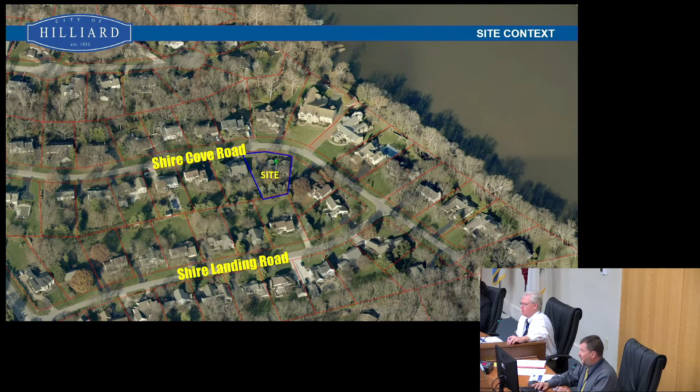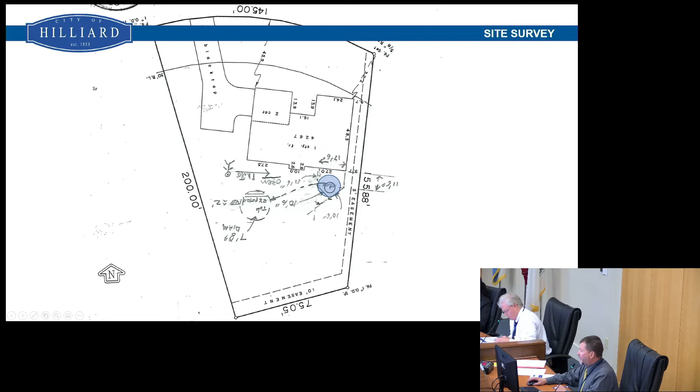This is a request for a variance to the code regarding swimming pool fences. The site is on Shire Cove Road as indicated on the screen, located within the Shire Cove subdivision, lot number 72. The site plan shows the general location of the existing hot tub. This is an instance where we've had some code enforcement action on the property, and this is a case to bring the site into compliance.

The staff believes that there's a beneficial use of the property that can be made without the proposed variance, and the proposed variance from the pool fencing requirements is substantial. The property owner's difficulty, we feel, can be obviated through another method, and we respectfully recommend disapproval. As noted in your staff report, there are a total of 7 cases regarding pool fencing that the board has looked at in the past, and we have noted the condition the board has imposed in those cases.

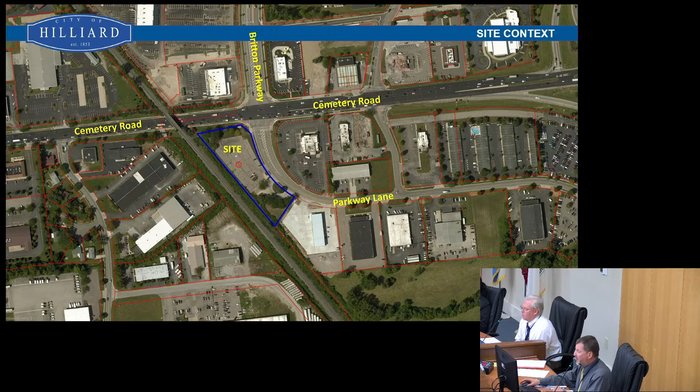Currently, the site is a COTA Park and Ride. Due to levels of ridership, they're looking to split this into two different developments—to maintain the COTA Park and Ride on the south portion of the site, and then to install a 3,400 square foot bank on the northern half along Cemetery Road.

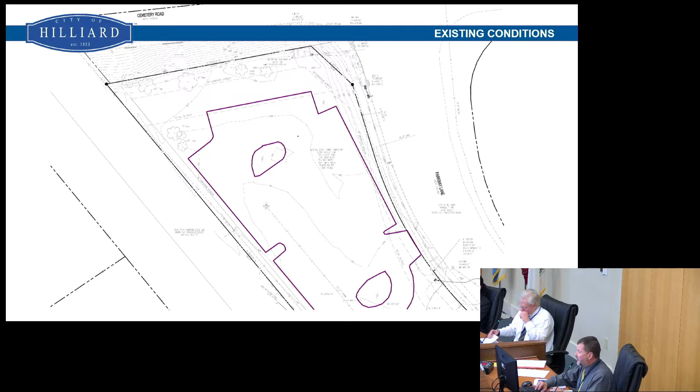What's shown on the screen gives you an idea of the existing pavement. The bank will be located within that area in general. They're looking to actually slightly reduce the impervious pavement on the site.

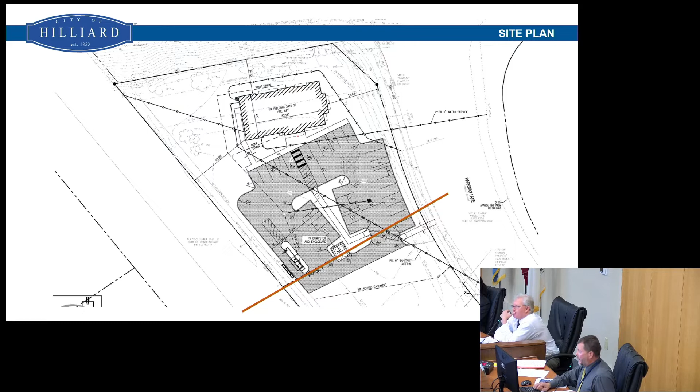This shows you the site plan and in general where the property line will be located, as approved by the Planning Commission as a lot split in their meeting last week. The commission also approved the Level B site plan for this as well.

The proposed architecture—the building will be located up along Cemetery Road. As noted in your staff report, we originally had a variance noted for the building setback, but upon further review of the code, there's actually a provision that allows for the reduction in the setback if you're placing parking behind the building, so that variance is no longer being requested.

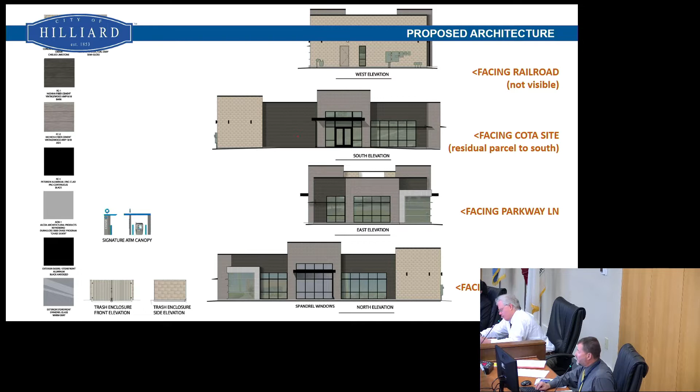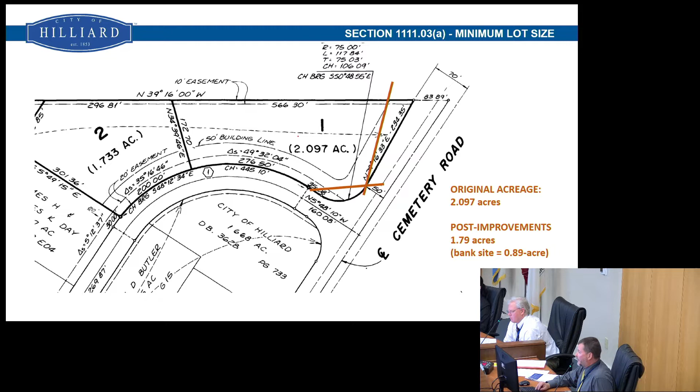They're also requesting a variance for the rear yard setback. This is going to be a joint parking lot between COTA and the Chase Bank that will use a cross-access agreement, as shown by the dotted line here. In general, the parking lot will provide a significant level of parking for both the bank and the levels of use that they need for the COTA Park and Ride.

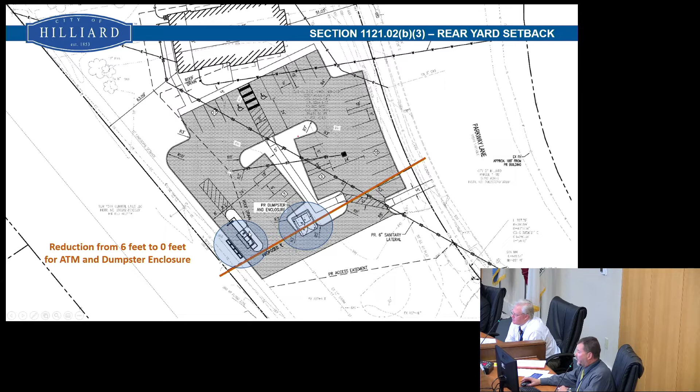They're requesting a rear yard setback to place the dumpster as well as the ATM along the rear joint property line that runs through the parking area.

They're also requesting a street tree waiver. There are significant utilities located along Parkway Lane, as well as the steep grade change due to the railroad overpass, so for those reasons we really can't place street trees in those areas. We're requesting as part of the conditions that those inches in street trees be placed on site or in an appropriate location as deemed necessary by the city forester.

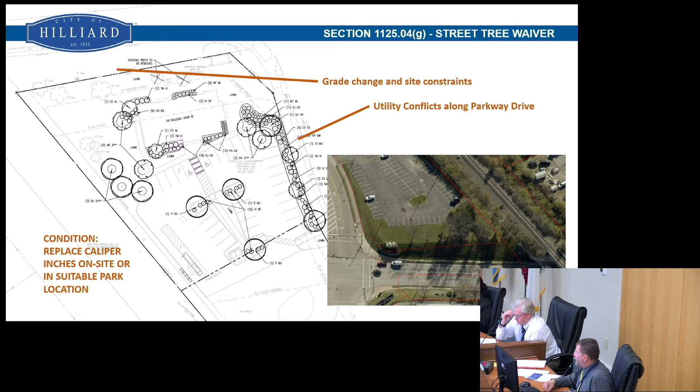They're also asking for some slight modification of the landscape code requirements, and we have those shown on the screen. They're asking to reduce the buffer width along Parkway Lane from 20 to 10 feet. The existing condition is basically at 10 feet, and so they're attempting to maintain the current pavement area. They are, though, placing the appropriate amount of landscaping along Parkway Lane within that 10-foot buffer.

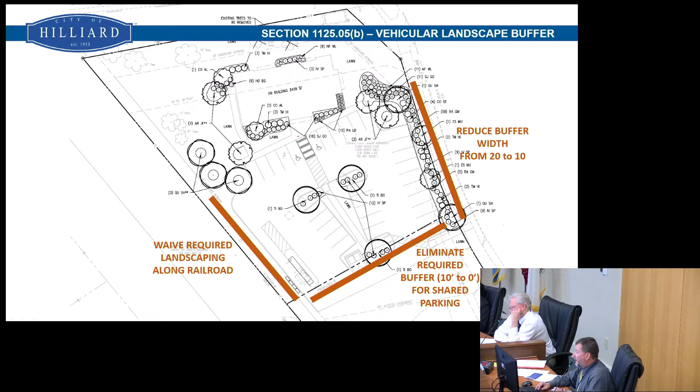They're asking to eliminate the required 10-foot buffer along the southern property line because the parking lot is being shared between the two parcels that would be created. They're also asking to waive the landscaping required along the railroad because of the intense vegetation that's currently there, so providing those landscape elements would really serve no purpose.

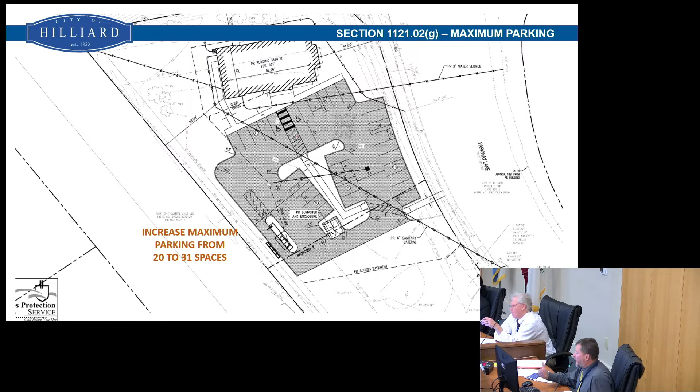The code also requires a limit to parking beyond what's required by the code, so a maximum limit. They want to increase the maximum parking from 20 to 31 spaces, and part of that is due to the fact that this is going to be maintained as a joint area between the COTA Park and Ride and the bank.

They're also looking to modify the ATM stacking and aisle requirements. The zoning code requires a width of 14 feet. We've very recently heard a request from a car wash application to the same effect. They're looking to reduce that from 14 feet to 9 feet. Originally, as noted in your information, it was 8 feet, but based on further discussions with Chase, Chase would like to maintain at least 9 feet of pavement. So they're looking to shrink this island up a little bit to accommodate the extra 12 inches of pavement. Is it 9 feet or 8 feet?

It is now proposed to be 9 feet, so they're actually more compliant with code. It's 8 feet in your staff report, but as of today, in talking with them, they wanted to modify that to 9 because Chase is actually going to require more pavement.

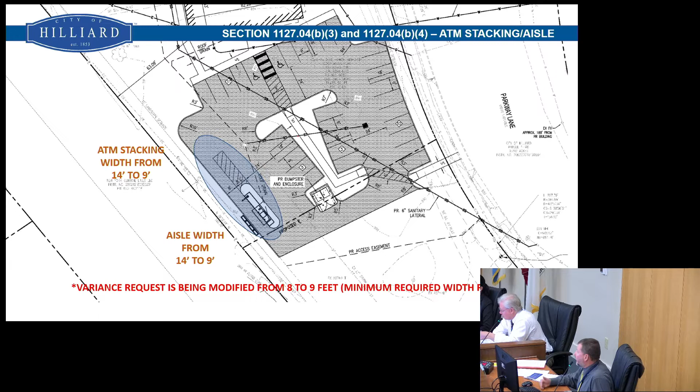Staff believes that the property has multiple site constraints that include impacts from the rail line, right-of-way improvements and takes that have occurred in the past, as well as the topography of the site. We feel that the proposed development is generally consistent with the code and keeping with the recommendations of the community plan to get buildings up closer to Cemetery Road, and we believe that the proposed development will not adversely impact the area. So we recommend approval with the 6 conditions indicated in the staff report.

Any questions for staff?

How many entrances will there be to this location? In terms of auto access, they're utilizing the existing curb cut, so there'll be 1 curb cut as it stands now. Will the buses be coming in there too? The buses actually have a turnaround that is just south of that, so it's completely separate from auto traffic. So they're not getting into that at all? No.

They'll share the parking with them, correct? Correct, the parking will be shared. South of that proposed lot split line, there's additional parking that will be maintained as part of the COTA site. And the existing trees on Cemetery Road, would they still be there? There are a few shown in the plans that will be removed due to construction activity. Those are being replaced per code.

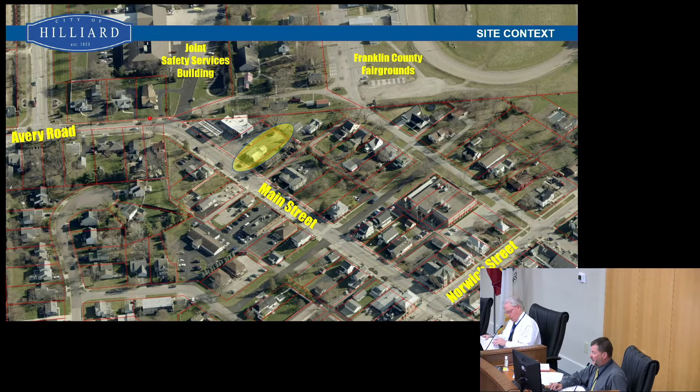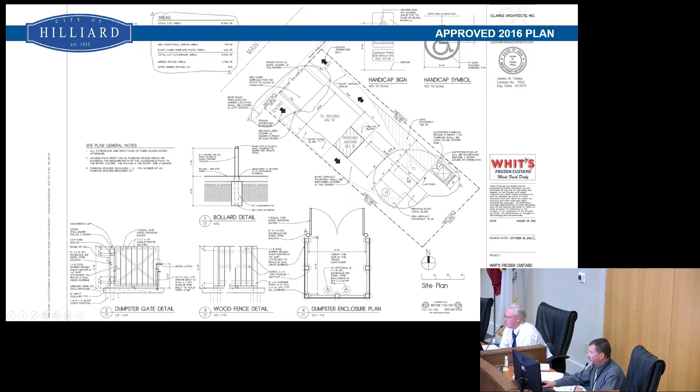Over time, that pavement was expanded out by gravel or other material onto the site. And then as of this past February, with I believe some code enforcement action or follow-up, there's striping and improvements done to the existing pavement. And then in question is the area that's shown in gravel.

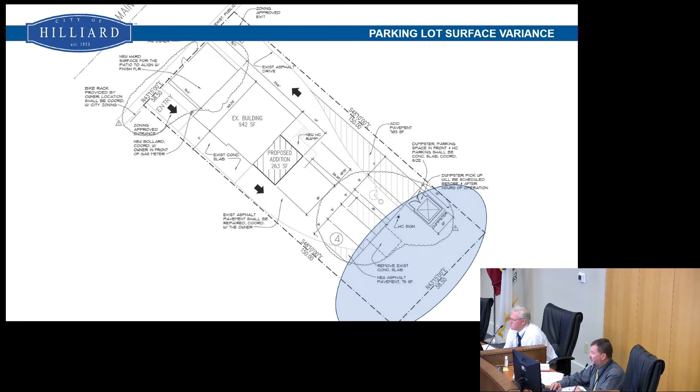This gives you a better close-up of the site plan that was approved in 2016, and then the area that we're looking at is the rear of the property.

Staff finds that the use of gravel for a commercial retail area is not appropriate, and it's a substantial departure from the code, particularly because of the level of traffic. Pavement is the required surface for all parking within the city, whether asphalt or concrete. For retail use especially, this provides opportunity for gravel to find its way onto the public street.

We feel there can be a beneficial use of the property without the variance, and the initial approvals, specifically from the commission, required that the parking lot be paved and brought into compliance with the code. So for those reasons, we respectfully recommend disapproval.

I just have one question. The report I read earlier said that gravel coming out into the street is the primary concern. Is that a concern here? It would have to travel over their parking lot, past their building, over the sidewalk, and then into the street. Does that happen here?

There is potential for that. In the past, when we've looked at variances, they've been for uses that are very low impact. In recent months we looked at a residential case with a long lane proposed to be gravel after a certain portion when adding a garage. Other low-usage cases include access drives back into utility areas for power companies. But when we're looking at retail uses with heavy turnover and potential for lots of pedestrian activity, the idea of gravel migrating across pavement is something we'd have concern with.

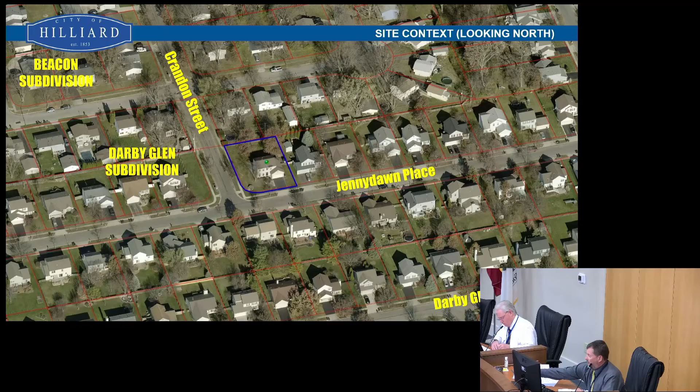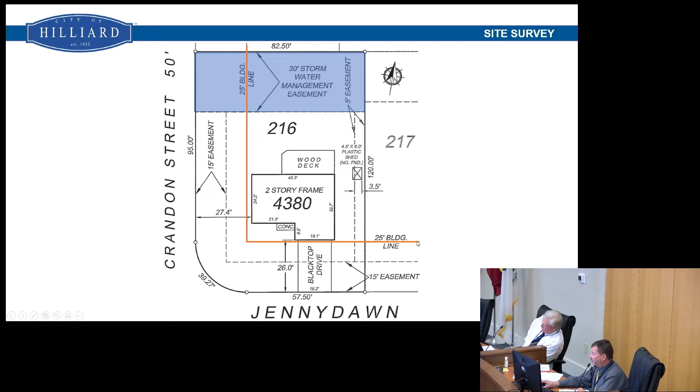The property is located at lot 216. Some of the site characteristics of importance with this particular lot include a 30-foot stormwater management easement at the rear of the lot. The orange line on the screen indicates the platted building line at 25 feet on both street frontages.

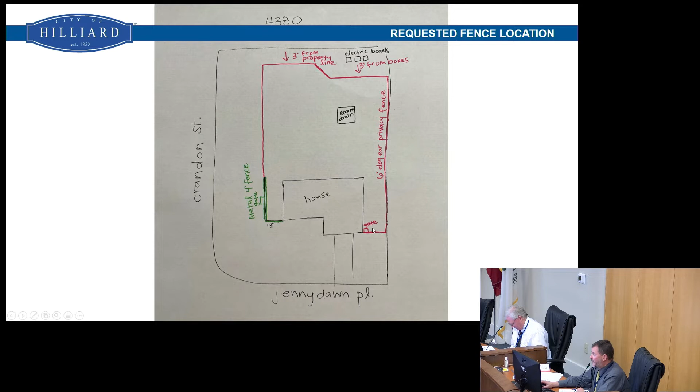What the code allows in this case is the implementation of a 6-foot privacy fence that has to follow the building line along the second frontage street. That would be one option to comply with code.

The second option, from a recent code amendment passed by council at the end of last year, allows for a 4-foot decorative fence to be applied from the front elevation of the building to the midpoint on the building line. In this case, it could extend 12.5 feet from the street frontage, as shown in the yellow line. What's proposed would actually be a 14.4 foot setback with the decorative fence transitioning into the 6-foot privacy fence.

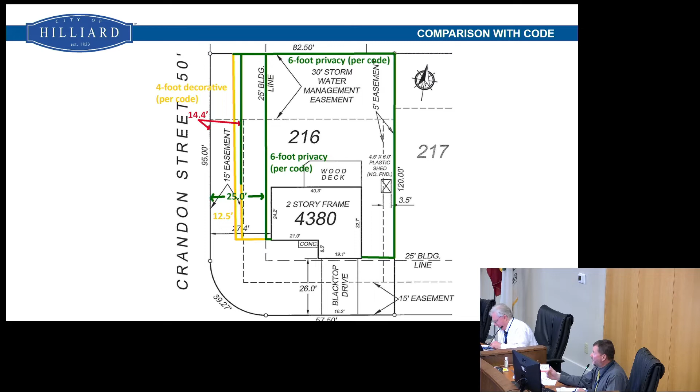The code specifically prohibits changing fence type along a property line, so utilizing two different fence types would be a variance from the code. In addition, the variance also calls for an added 2 feet. By putting the 6-foot privacy fence in that location, it exceeds the 4-foot height allowed in the existing code.

Staff finds that the intent of the new code passed by city council is to provide greater flexibility for corner lots while avoiding visual obstructions along the street. That's why privacy fences are generally not allowed to go forward to the building line on the second frontage. The proposed variance can be addressed by either utilizing the decorative fence along the entire frontage or utilizing the privacy fence in the location allowed per code. In our assessment, the applicant has not demonstrated a hardship or practical difficulty that would necessitate a variance from the code, and we respectfully recommend disapproval.

Any questions for staff? Is it just the one side where they started with the decorative fence and now want to continue with a 6-foot fence where that stopped? Is that the only side, and if they were to continue with the decorative fence all the way to the end, would that be allowed?

If they continued with the decorative fence along Crandon Street all the way to the back property line, they would generally be in compliance with the code. They could do the 6-foot fence along the rear property line, and I believe they've already started to implement fencing around the opposite side of the property, though I don't know to what extent. I believe they were in the process of installing it when code enforcement halted the installation.

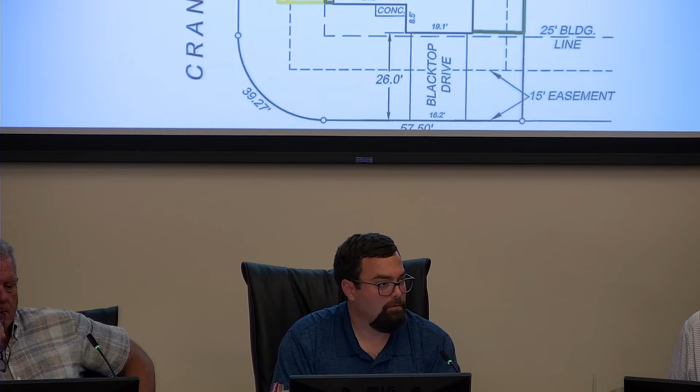Well, that might be an oversight, but to have a 6-foot fence forward of the build line requires a variance. So the area shown, from the 25-foot line to the Crandon Street right-of-way line, that section along the rear property line is in the secondary front. Can you show us the neighborhood map again?

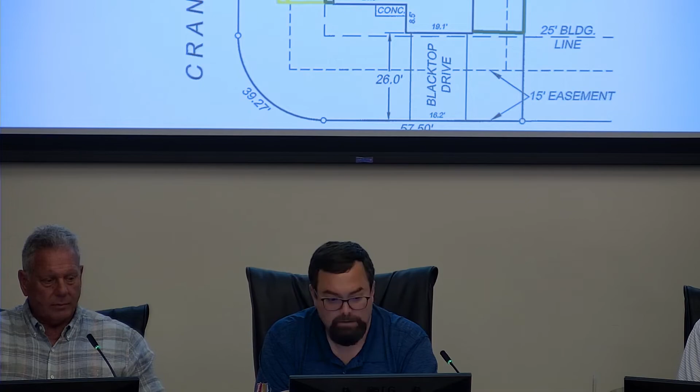Okay, well I'll make this point though: there's the fence along the halfway point of the build line. If you think that's appropriate, but you also think it's appropriate to connect from the end of that along the rear property line with a 6-foot privacy fence in that section, that's different than if you vote the thing down, because then from the 25-foot build line out to Crandon would have to be the ornamental fence.

Well, why do we have that yellow line running the whole length on the left? That's code, it's showing the midway point of the easement. Basically, they can come out to that midway point of the easement.

Yeah, that's what they just changed the code with, because there were so many fences and everybody was giving up so much of the side yard. I agree, it didn't look good to have somebody build a high privacy fence all the way out. So the middle ground that was struck was, if you want to gain the extra yardage, you can, but you can't do a tall privacy fence. Correct, so that's my understanding of what's happened, and I support that.

I don't support having 2 types of fence in one row. I think that would not look professional and wouldn't enhance the neighborhood. So then all you need is a variance for that back fence. If the board agrees we want that line on the left, you can put the 4-foot fence all the way back, but you'd still need a variance for the 6-foot privacy fence from that corner over. Yes, I'd be good with that. Correct, okay.

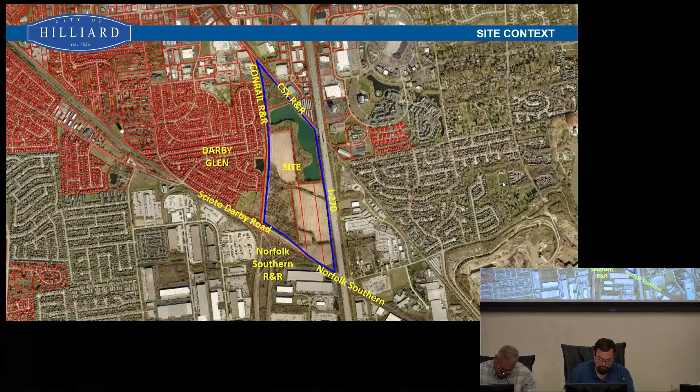This site consists of 6 parcels. As you can see here, they are all zoned M1 Restricted Industrial District, and the data center is a permitted use for the site. To the south is Scioto Darby Road, to the east is I-270, and to the north is

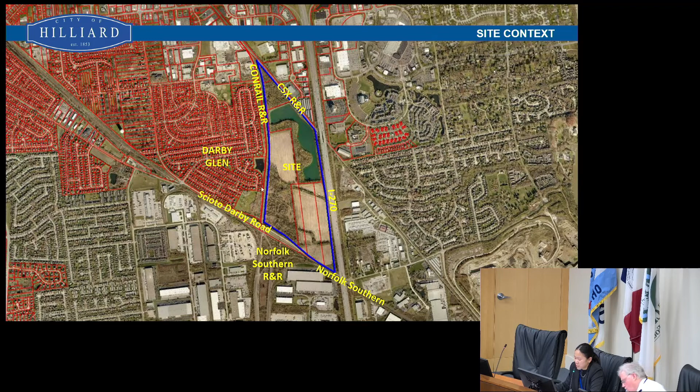There are also some support services buildings, such as the security building, located throughout the site. To the southeast you have an AEP substation and transformer yard, and access to these sites will be separate. First there's an access drive going into the data center area, and then another separate access drive exclusive to the AEP substation.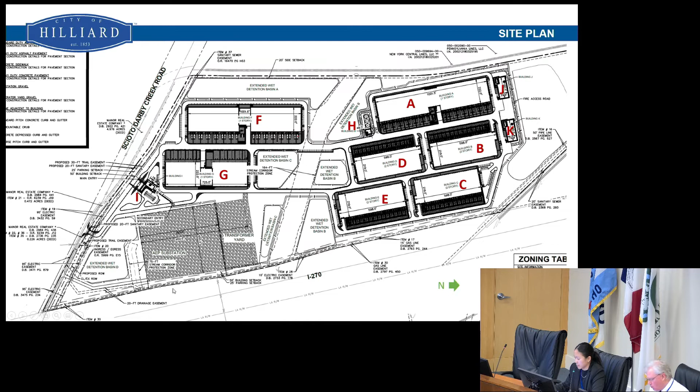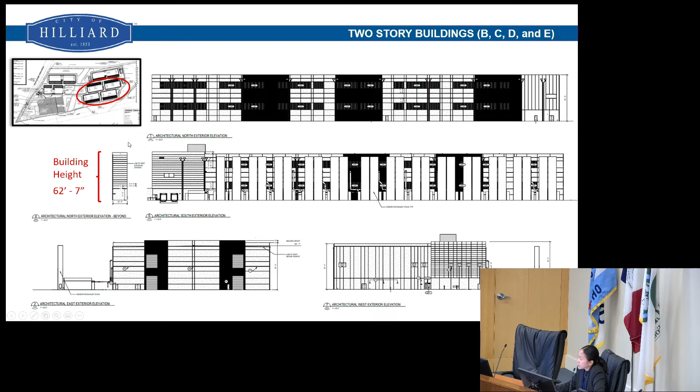4 of the buildings on the site are proposed to be 62 feet 7 inches tall. The maximum building height for buildings in M1 districts is 45 feet, so the applicant is requesting a variance for 63 feet. The structure and materials, the general architecture, does fall in line with the 1-story buildings on this site, as well as the architecture used for the data center buildings on an Amazon site located between Cosgray and Leppert Roads that was approved in 2021.

The site plan locates the 4 2-story buildings along I-270, and not towards the western side of the site, which is zoned PUD.

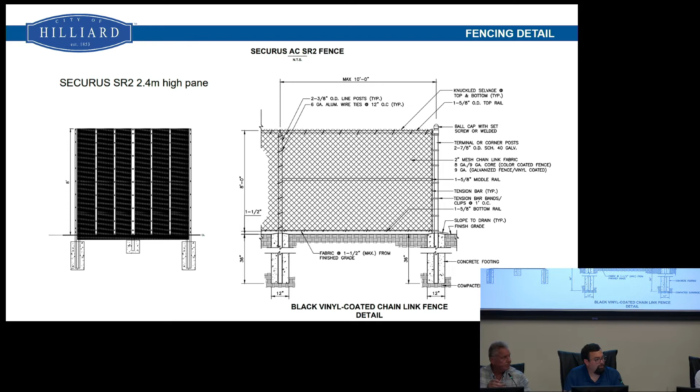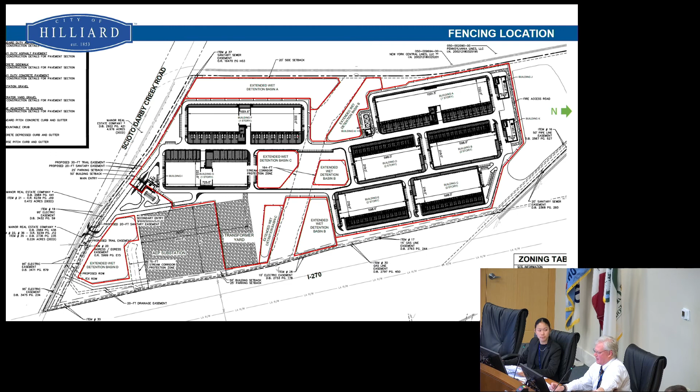Okay, all right Abby, did you get to finish, or? Yeah. Oh, I did have one thing—so can you go back to the one that had the heights of the buildings and the level of the street? Yeah, that was nice.

So the reason we wanted to show this is because at the planning commission meeting last week, there was some confusion about what the view from I-270 was going to be. And there was some thought that because on that street, as I-270 moves up and down over the railroad and over Scioto Darby Road, it gets higher in some places, and then on the east side of the road, you can actually look down on a 2-story building.

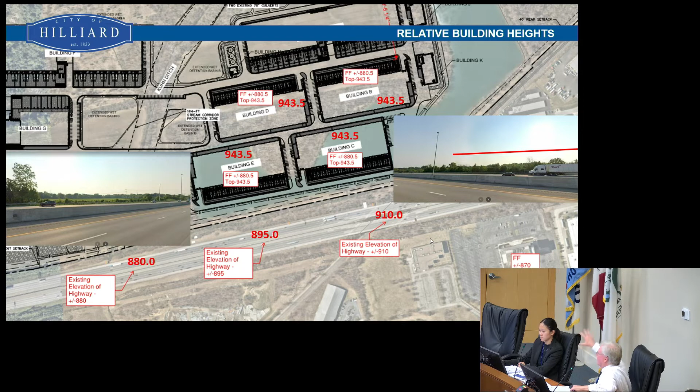That's not the case. So in this case, starting down the bottom left, highway elevation is 880, but you look at the finished floor level—that's what the building floor is going to be, 880. But you see the top's going to be 943. So the building is going to be 40-some feet above the street level, or even 33.5 feet above, depending on where you are along there. 30-some is probably consistent with what we saw at the facility at Hayden Run Road, from the 1-story building there. So with this building, you're going to see the building—you're not going to look down on the rooftop with the mechanicals and all that kind of stuff. That was one of their concerns.

The 2-story buildings will also help screen some of the 1-story buildings that are farther away. We think this is a great plan to put the taller buildings near I-270, the shorter buildings on the western side as you get close to the railroad, and then the Darby Glen subdivision. So there was just some confusion as to what that look was going to be. This, we hope...

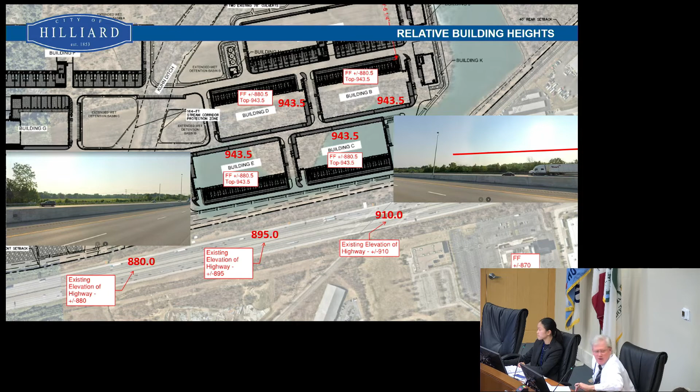Solves that for you. One thing we didn't cover is the tree replacement—yeah, thank you, and that's because we haven't gotten... did you want to talk about that? We haven't gotten a tree survey from them yet, but the proposal is 300 replacement trees on this site.

They're showing on the plan 318 replacement trees, 3-inch caliper each. That's 954 caliper inches of tree on this site. Our recommendation is whatever the tree survey shows, we think the minimum number of replacement trees ought to be the 318, or the 954 caliper inches. They're spread around the site, and we think that's a fair number. I just think it's not going to be possible to meet the code requirement exactly in a reasonable fashion.

It's just going to be way out there, taking down too many trees. Exactly. And so we saw a similar thing with the BMW Financial Services building. The amount of trees that were on that—I think the replacement tree requirement was going to be, just for replacement trees, about $750,000 back in 20-some years ago. It was an extraordinary number. You really can't develop reasonably with that type of number.

If you would like to wait to see the survey and what the total number is, I don't think it's going to matter in our recommendation, because we think that 300 additional trees on this site will be good. The site's difficult, but they do have a lot of plantings on it. So we think it's going to look nice from street level, and it's not like they're trying to skate on the tree replacement—954 inches is a lot of trees, and that's just the replacement. They've got other tree requirements based on the size of the buildings and the parking lot perimeter.

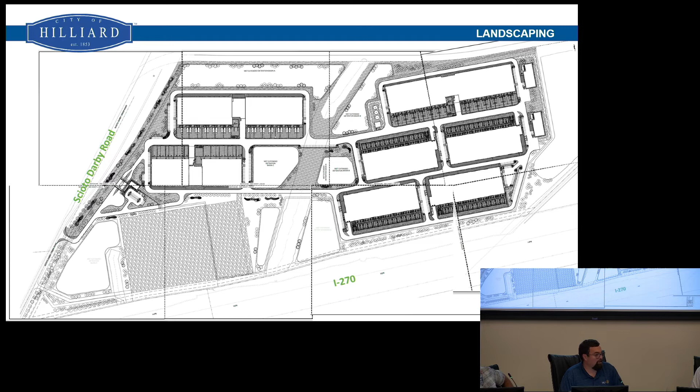And then it would be good to hear your thoughts on the building heights. It seemed like you're comfortable with that, the 2-story height? I don't see anybody here opposing it yet, and although I don't see anybody from the city really lobbying for it, so — We are. Well, other than you.

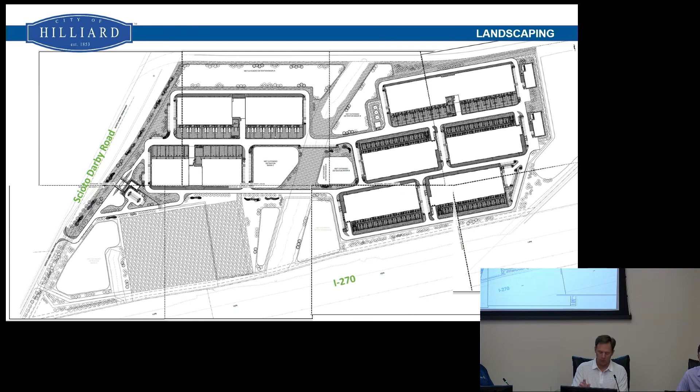The one question I would have about when you talk about different fencing along the same property, it's 2 different types of fence, but it's consistent all the way down. Just with our last case, we don't want the 4-foot going into the 6-foot. That's not what you're looking to do. No, that's just to cover this in case there's a different interpretation down the line. So it's consistent, it's just 2 different fences. Correct. Okay, exactly right. All right, is the applicant here?

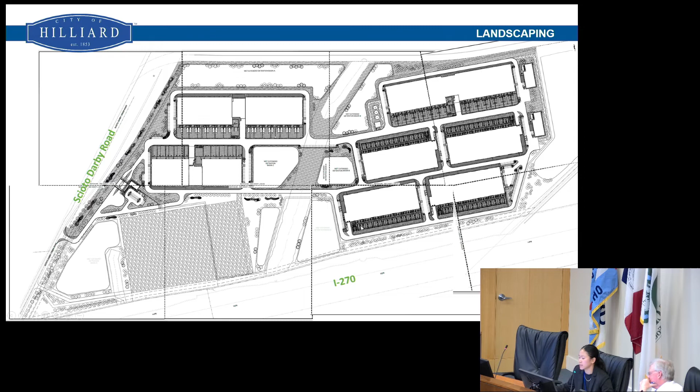Sorry, I jumped in. Oh, there's a few more points about variances. I thought you were done. So I guess, you're good. So I guess the one thing to note too is that the applicant has said that they will try to maximize the existing landscaping that's along Scioto Darby as well as I-270, because leading into another variance, the 10-foot wide perimeter landscaping.

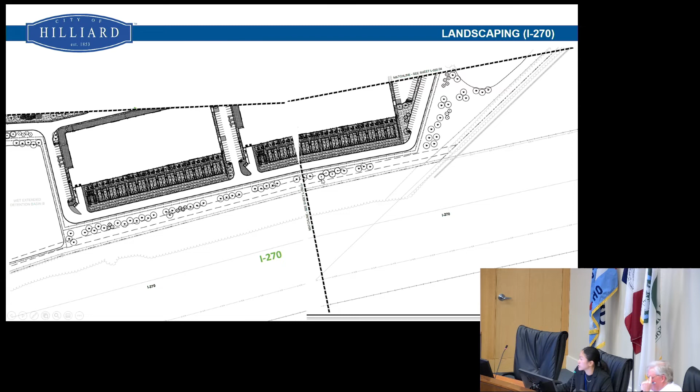They would like to request a waiver for that, so that way they do not have to do the, I believe it's 2 trees and 30 shrubs and a 10-foot wide perimeter along I-270, just because of the grading over in that area of the site, as well as the existing vegetation. They just want to really try and maximize that instead.

And then parking, the site does propose parking without interior landscaping on the inside, and so it would request a variance for that as well. As you can see, these are all the areas where it is longer than 100 feet with no interior parking landscaping, and the majority of parking is in single rows. Can you go back to that one? So if I may...

This situation is consistent with the facility at Cosgray and Leppert. And what we did, we worked with them, and it was written into their PUD stuff. So the extended nature of the number of parking spaces, which doesn't meet code, we are comfortable with that because they end up providing the landscape islands on the ends of each row along all those, and we thought that was a good move. It helps because it's built at the corners of the buildings, plus in most of these locations, you are not going to see these from off-site.

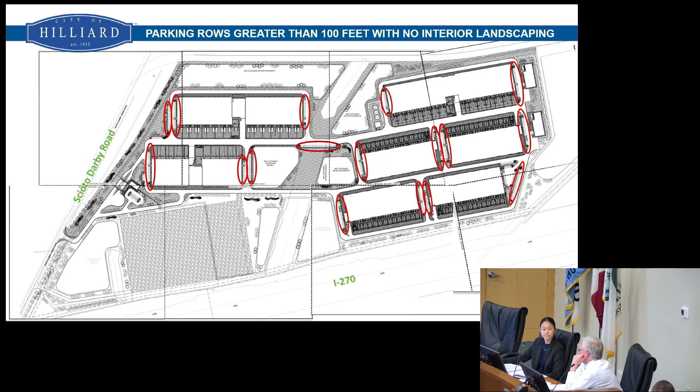And the number of vehicles that come to one building at a time, they all come in there. We just want to make sure that the number of spaces is adequate when they come in, because they all come in kind of in one spot at a time when they're working in a building. So we think this is appropriate, but it does need the variance, and the building size is a little different, but it's almost exact in terms of its application as the approved site at Cosgray Road. So we're comfortable with that arrangement.

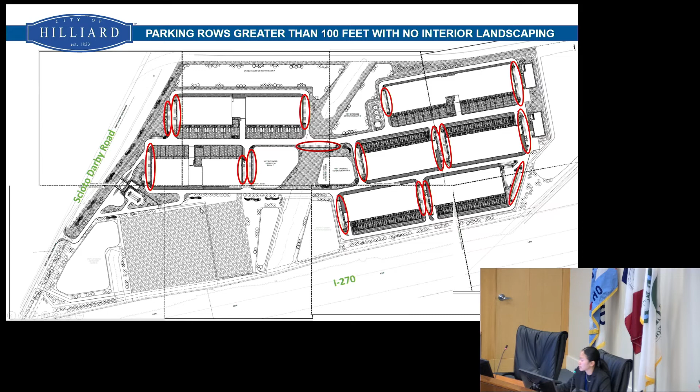It seems like a tremendous amount of parking. The applicant can talk about that, but yeah. And then, as previously mentioned, the majority of parking is inside the data center, so all of this is fenced off. The parking that would be available from outside the security fencing would be this double row parking up here towards the front.

Overall, staff finds that given the unique location and setting of the site, the proposed variances the applicant is requesting do seem to follow the general intent of the city code, and allowing fencing variances for increased security measures at the site seems appropriate. Staff recommends approval with the following seven conditions.

The applicant was asked to state their name and address for the record. My name is Derek Leary, 7965 North High Street, Columbus, Ohio. I'm with Kimley Horn, the civil engineering company helping Amazon with this project.

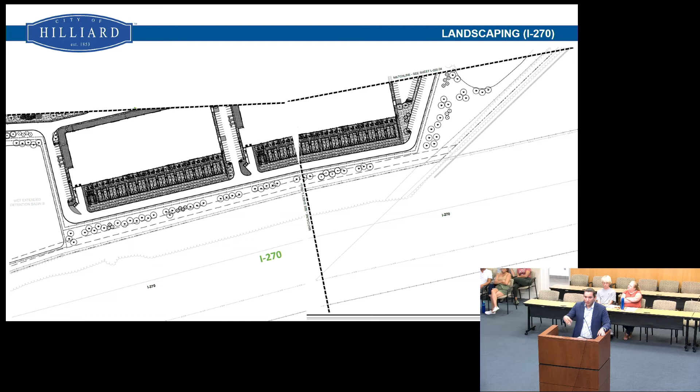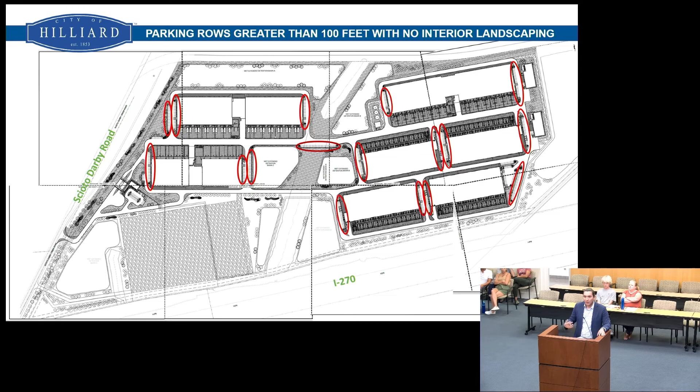I'm mostly here to answer questions, but I wanted to expand on the landscaping surrounding 270 and the frontage. There's a large amount of existing trees in the 270 right-of-way ditch, the Scioto Darby right-of-way, and the railroad right-of-way that already create a natural 30-foot buffer. We still have all of our replacement trees along those areas as well, so we feel there's already a buffer created naturally, and through the extensive plantings of the replacement requirements we're still providing trees on site.

There's also, specifically along 270, a gas easement with a high pressure line, so we're purposely not doing any work in that easement, just to ease coordination with the gas company during construction and design.

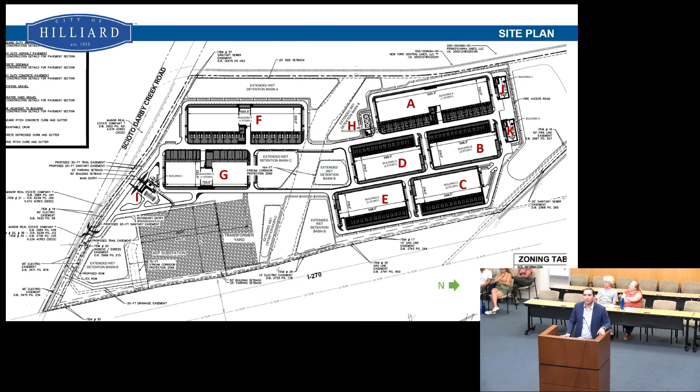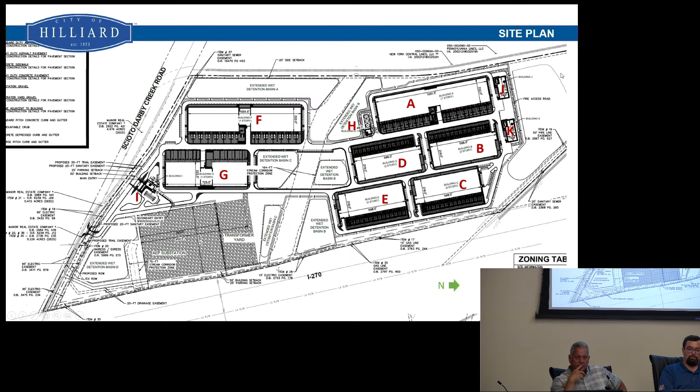A question was raised about the fate of the existing lake on the site. Some of it will be retained, but some will be filled in. The north portion shown on screen will be retained, but about two-thirds of it, most of it along 270, would be filled in.

We're not the wetlands engineer handling that permitting, but there is a stream through this site and other various wetlands for which we have to obtain the necessary OEPA permits and Army Corps permits. That lake, as we understand it, isn't regulated by anyone because it was man-made during the 270 construction.

Yeah, it was. Some monster fish in there too. That's what we've heard, some stories about it.

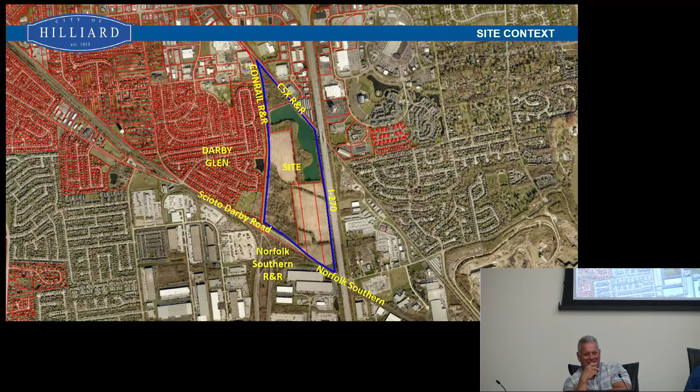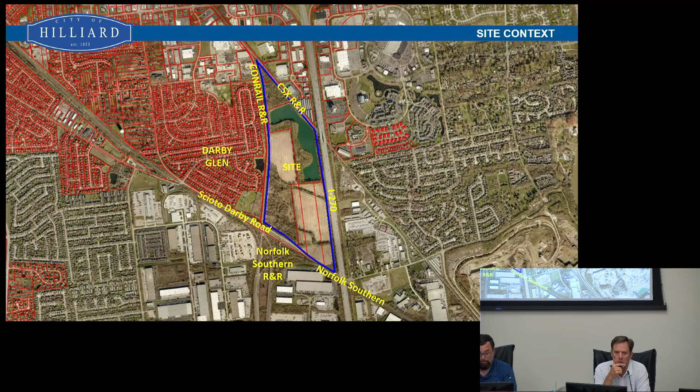A question was asked about the impact on natural screening once the fencing goes in. The questioner clarified they appreciate the intent to maintain the natural screening already on the property, and asked whether the double layer of security fence is being placed inside that natural screening. The applicant confirmed yes.

The natural screening being referred to is just off our property, so we wouldn't be able to disturb it. It's within the right-of-way on all three sides.

In the tree survey you can see there are quite a few trees, and that survey has taken a little longer than anticipated, which is why we don't have it here yet. But anywhere close to our grading extents where we can save an extra tree or two, we'll do so during construction, making sure we preserve anything along those natural property lines and right-of-ways.

I wanted to comment on the replacement trees as well, because of how we got to the number 318. Via aerials we estimated the brush and assumed a caliper inches per acre to propose something reasonable, since we don't have the exact survey data back yet. We're still trying to meet the intent of the replacement requirements, we're intending to plant and try to meet it, but because we don't know the exact math, we proposed 318 trees at 3-inch calipers, which is how John got that number.

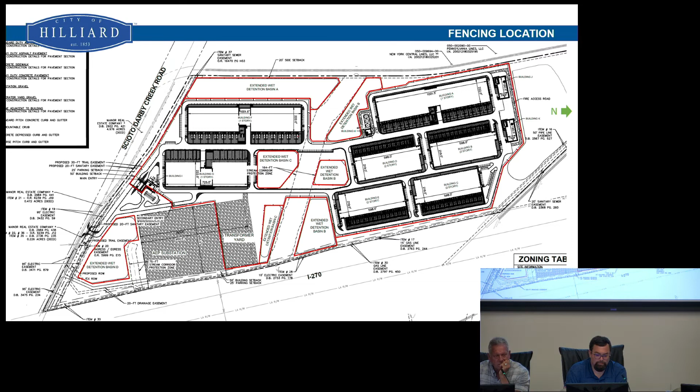Asked how many full-time employees will be on site after construction is completed, the applicant said he honestly didn't know the answer. When helping create these site plan layouts, the minimum needed per building is 50, but they've seen that number increase when there's room, to help address issues seen at existing facilities, especially now that the Hazelton one is more fully operational and they're seeing they need more than the 50 originally planned for.

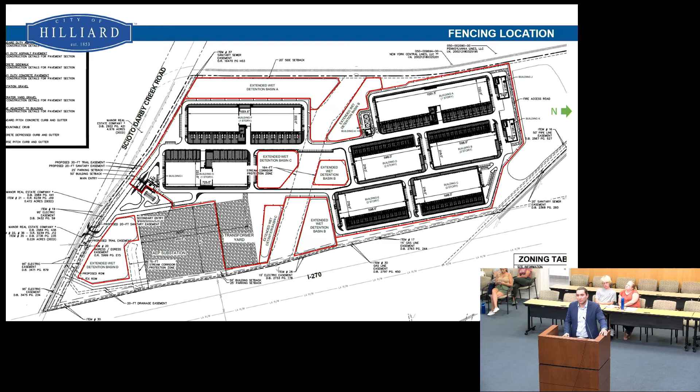Any other questions for the applicant? Thank you. Are there any comments from the public? Okay, do we have a motion? I will make a motion.

To approve variances to the Hilliard zoning code for a 152.13 acre data center complex: section 1113.03B, section 1121.02 D1G, section 1121.02 D3, section 1121.02 D4A, section 1125.04I, section 1125.05B, section 1125.05C3, section 1127.02G, provided that the 7 conditions in the staff recommendation are maintained, except for condition number 3, which I will amend so that it now reads that a tree survey is provided and that 954 caliper inches of replacement trees are provided.

Second. Mr. Donato? Yes. Mr. Martin? Yes. Mr. Stepp? Yes. Mr. St. Clair? Yes. And Vice Chair Ebling? Yes. Motion carries 5-0. Thank you.

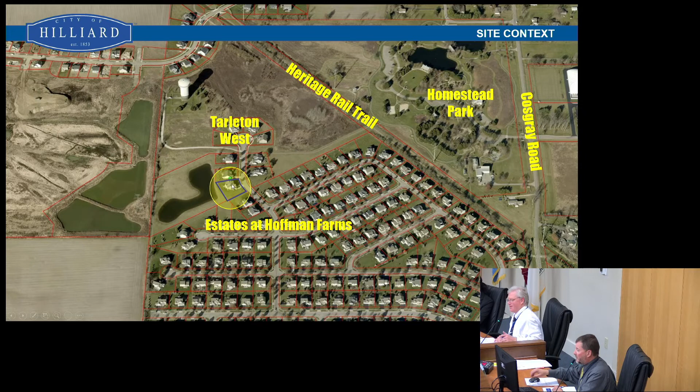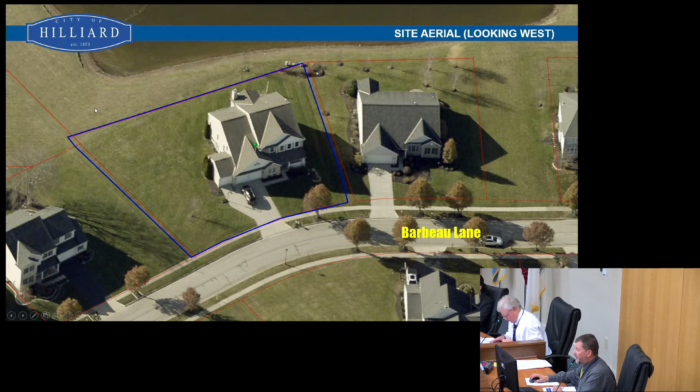The property is located in the Estates at Hoffman Farms, as shown on the screen, just south of the Tarleton West subdivision. It's a fairly large lot located on a cul-de-sac street. This gives a close-up of the house, with reserve area just to the rear of the lot. This is looking west toward the end of the cul-de-sac.

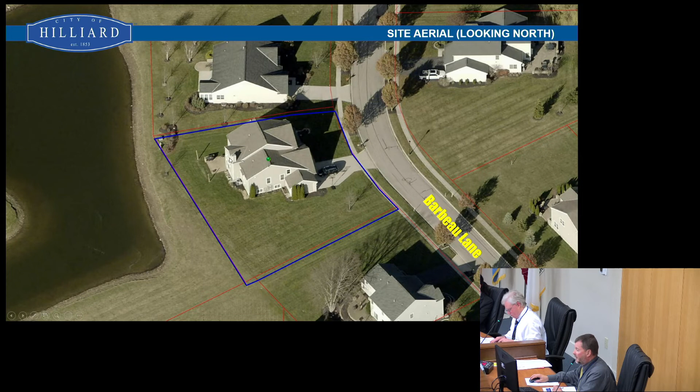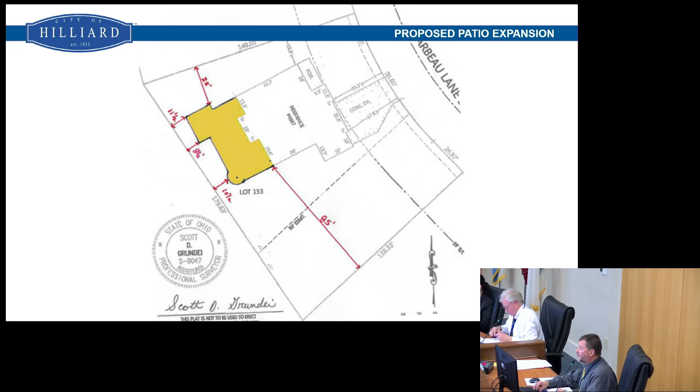This is a detail of the proposed plans. The jacuzzi tub is actually up by the house. They're looking to get approval to allow for a locking cover. And again, the setback would generally run along the extent of the patio, clipping just a portion of it.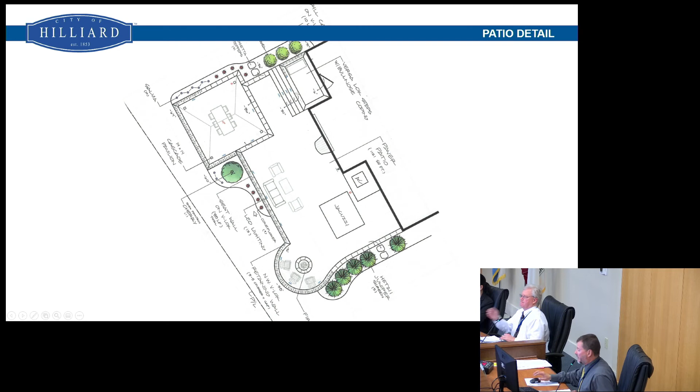Thank you, staff. I would like to point out that in case 1, we voted down the identical variance under 1121.02D5, to permit a locking cover in lieu of a fence around a jacuzzi.

So I'd like to also comment on that — everybody knows I've been consistent. I want to ask if this is an above-ground hot tub or if it's recessed in the ground, because the other applicant's hot tub was in the ground, which to me is more of a hazard since a 4-year-old could easily walk up and get hurt. I don't want to elaborate on what we already discussed, but in the past we have approved locking covers on above-ground hot tubs. So that's my curiosity — is this in-ground or above-ground?

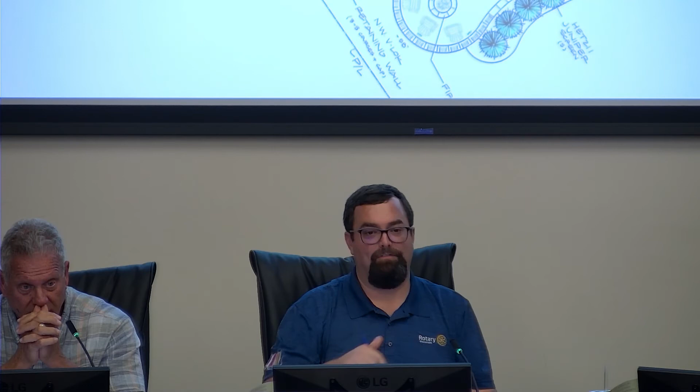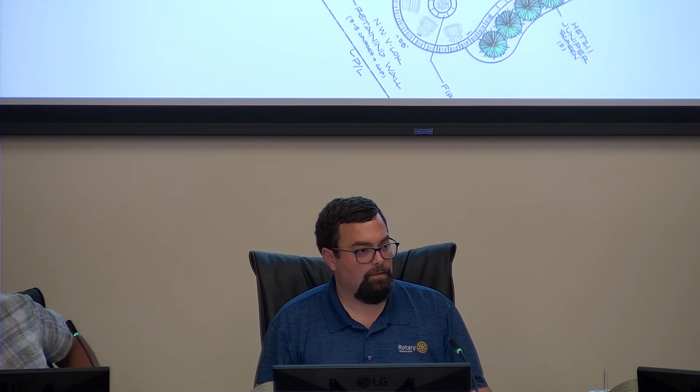All right, any other questions for staff? And the applicant may come up and please state your name and address.

My name is Judy Opalek. I'm a resident at 4867 Barbeau Lane in Hilliard. In answer to the question, it is actually an above-ground hot tub sort of setup, similar to this. It's not quite this model, but very, very similar.

Any questions for the applicant? Do you have anything else that you'd like to add? I would like clarification of the language from the recommendation.

So it says that, let me find it here, in prior cases, the board has approved requested variances with the following condition: that a jacuzzi remains covered and locked when not in use, but that you recommend declining because we'll have a cover engaged when it's not in use. Is that the same thing?

That's the staff recommending to us that we don't vote in favor of your application. Meaning? That we vote it down, that you don't get a hot tub. Or that you have to put a fence around it. Yeah, and that's okay, because that's what the current code says.